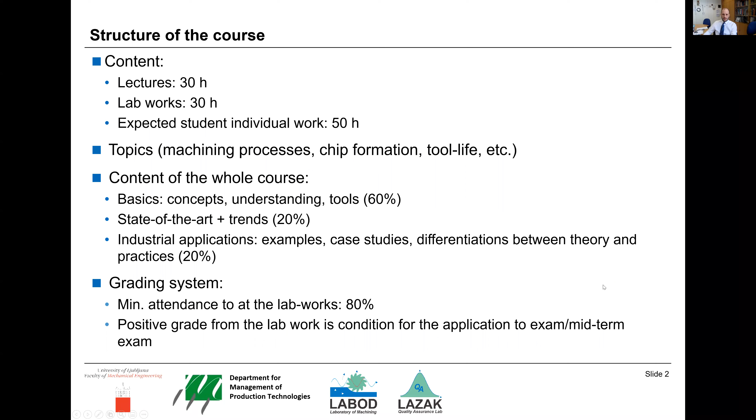The grading system is composed based on the lab works and the theoretical exam, and lab works are mandatory. 80% attendance has to be assured by the students. When this is performed, or accepted as positive, meaning they did all the lab works with the reports and so on, they are allowed to go to the exam.

We usually organize also a colloquium, so midterm exams. Half of the content is checked at that time from the students - let's say the half of the semester - and then at the end of the semester, if both of those colloquiums are positive, it's treated as the theoretical part being done.

If not, the students can go on the normal exam. Two chances to pass the exam are just after the finish of the semester, during the exam period. If that's not enough, or if they were not able to either attend or pass the exam, they will have one more chance before the start of the next year, in September.

The eligibility criteria I already talked about - it is mandatory that students first finish the lab works or practical work, and then with that they can go to the exam.

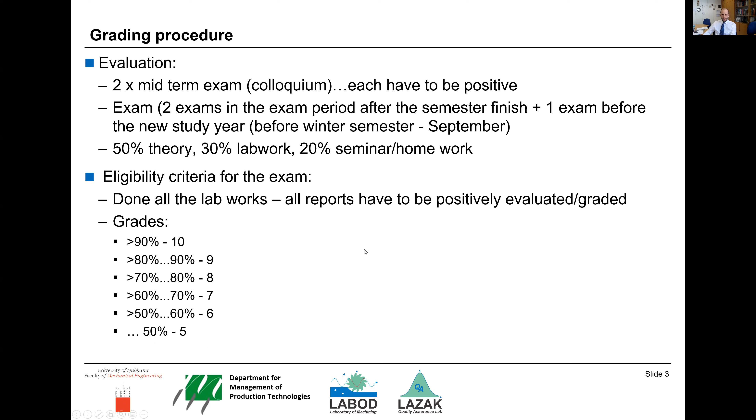Prerequisites for this course are related to the lectures in the first bachelor degree study: production technologies 1, physics, materials, machine elements, and tribology.

The objectives of the course are to give students in-depth knowledge on machining processes, from basics to advanced and innovative machining processes and technologies, so they get knowledge on the development of technologies, the calculations of costs, loads, tool life, optimization, and production cycles and so on.

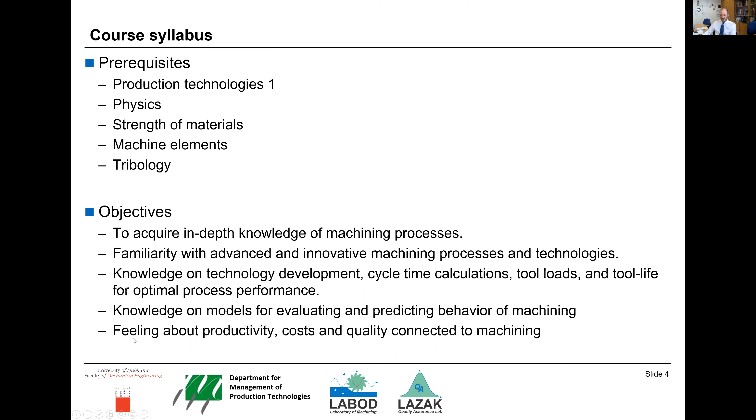Then to get the feeling about productivity, costs, quality connected to machining and the final product. The competences expected to be gained include understanding the field of machining processes, being able to evaluate, predict, and optimize the processes, and mastering the fundamental, theoretical, and applied knowledge on machining processes, machining technologies, as well as broader manufacturing technology.

Knowledge expected follows from the expected competences and skills, basically the same. As I said before, maybe the added part is that the ability would also be to critically reflect on machining process strengths, and even think about innovative R&D in this field.

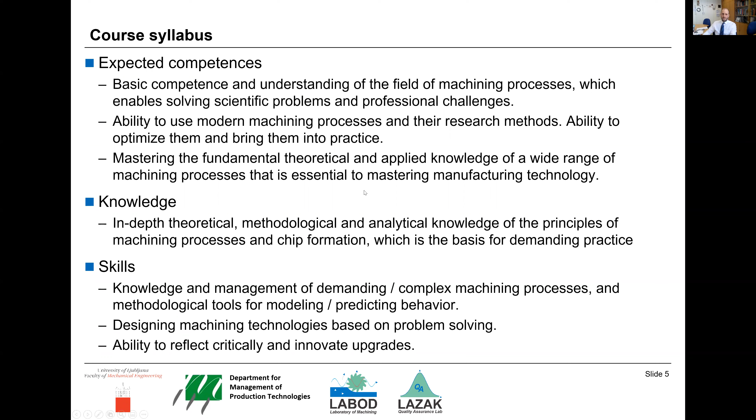How do we do the lectures or the whole course? Of course we have lectures in class. Then on the other side we have the lab works. In between, we also have practical work in the classrooms, where students, beside the theory they get from lectures, are introduced to practical work that will later be demonstrated, used, and tried in the lab work environment in really small groups.

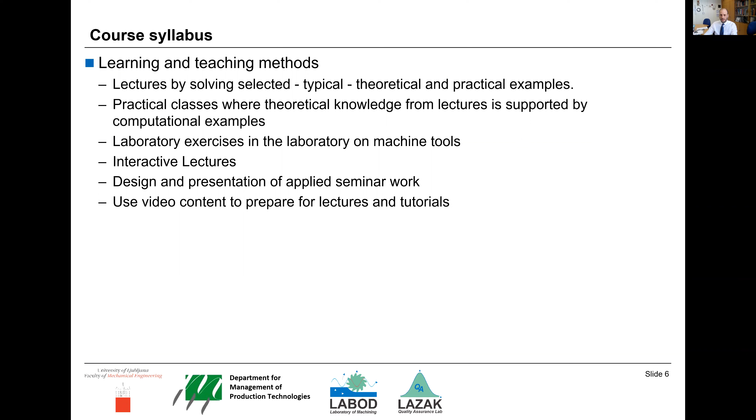As well, all the lectures are recorded, so the students will have the ability to go through these lectures later. If they were not able to attend, they will have the chance to attend it somehow, or repeat this if something is not clear. So that's why we upgraded the lecturing with modern teaching methods. All the lectures in this course are recorded.

That's related for now to the master degree level, where there's a huge possibility to select. Students have the possibility to choose their own lectures, or individualize their program. We have 6 study directions: 2 in energetics, 1 construction, then mechanics, production, mechatronics. Depending on which study direction the student chooses, they get 10 dedicated lectures for that direction. However, besides that, they can choose almost the same amount of lectures from different directions, so 8 individually selected courses. That means they have 18 dedicated lectures they will attend.

Since there is the possibility to select individually what they want, that means all students will have their own programs. And we face the problem of how to assure or give students this possibility to select lectures without overlapping lectures or even lab works in some cases.

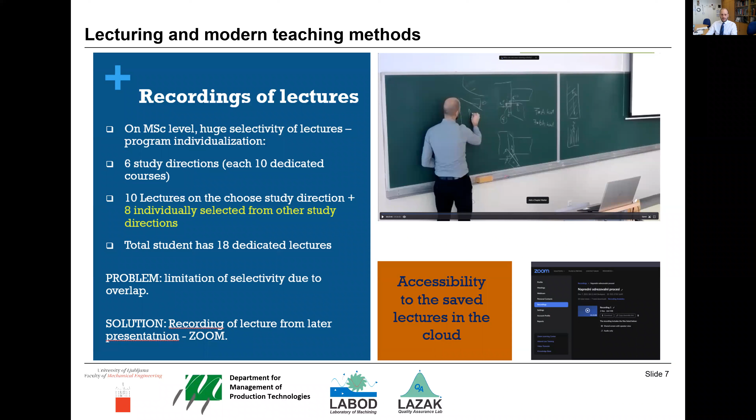So the solution is recording the lecture. If they cannot attend the lecture in person, they can later check it at home whenever they want, whenever they have time. So they will have accessibility to all these lectures.

The other digital solution we introduced is the answer to the problem before. If we have huge selectability or personalization of the program, then the question is how can we assure the timetable for the students? Each student will have their own timetable, and in the conventional way of having one table putting everything in, it doesn't work anymore.

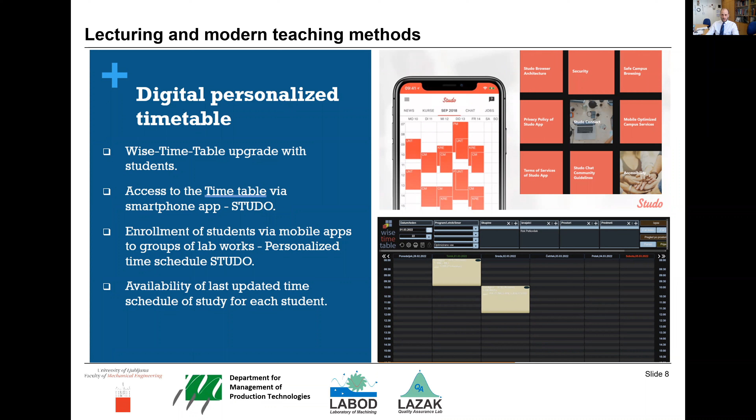So we now have introduced an app that provides students their own timetable, and they even have the possibility to prepare their own timetable according to the lab works. The same lab work has different groups, so there's repetition, and they can choose their own best fit group. Even for lab works, they assign themselves via smartphone app, and anytime they can see their own timetable or arrange it according to their schedule or availability.

The third digital app we introduced is the digital attendance list. It's an app that gives students the possibility to prove their attendance at different lab works, even lectures if they want. It's not obligatory now for the lectures, but for the lab works it is.

They will see which group they are in, where they have the lecture, and then when they go to the lecture they will prove their attendance. At any time, anyone from our student office, the student, the lecturer, or the lab work holder will know who was where. You can check how everything is tracked and easier. This information is easier to obtain.

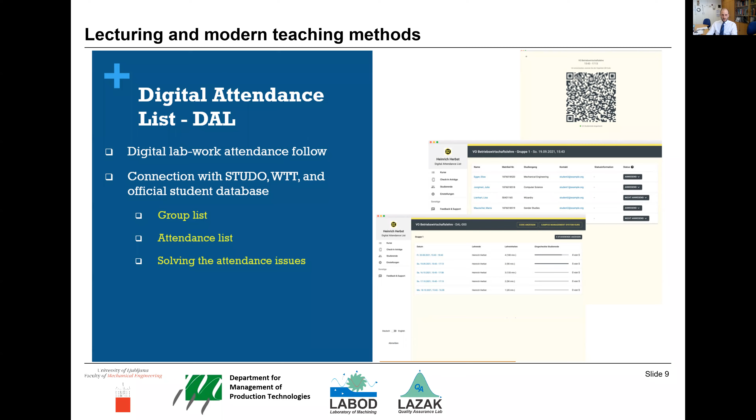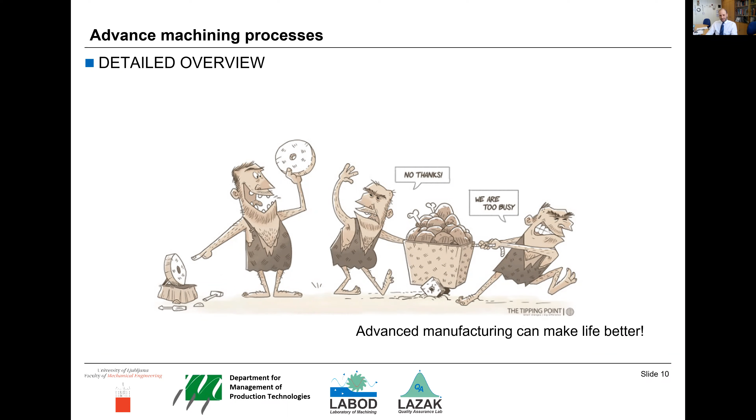That's the framework in which we work, and now going to the advanced machining process lecture. What we can say is that advanced manufacturing can definitely make life better. The content of the lecture: we have 15 lectures, each 2 hours long, so 2 hours per week for 15 weeks, the whole semester.

We start with the basic kinematics of machine tools and chip formation. We introduce the system of machine tool, cutting tool, workpiece, how they interact, the kinematics of machining processes for different processes, and the tool geometry and terminology behind it. Then we continue with the second lecture dedicated to defined geometry machining processes, like turning, milling, drilling, and so on.

We define first the cutting geometry, what's important, how the chip is formed as a consequence of the cutting tool geometry, and what are the basic machining parameters and how they interact with the chip formation. Then we go into the chip formation models, mechanics of orthogonal cut, mechanics of oblique cut, so it's from 2D to 3D. Then the application of the cutting models on real machining processes.

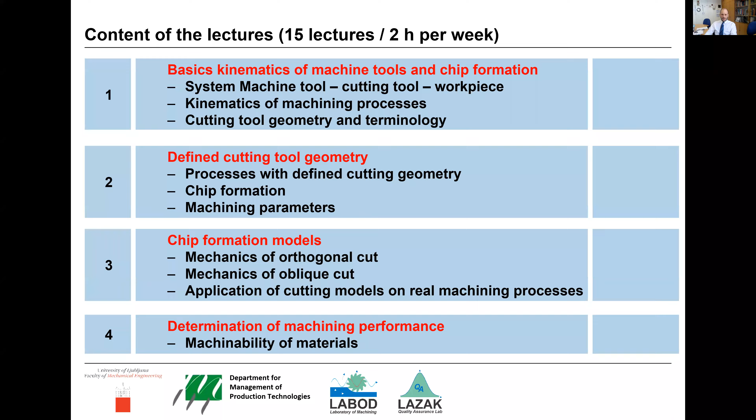So we show the practical experiments or practical applications of those mechanics of the chip formation. With the fourth lecture, we go to the machining performance, machinability, how different materials behave in machining, what availability they offer to form the chip, how the machining strategy and criteria can be met in effect, and vice versa.

And at the end, how we ensure productivity, what is productivity, what is the material removal rate, and that's a step in the direction into the optimization. Of course, the productivity is not just about time, but also the energy consumption that is related to the cutting process. So in the 5th lecture, we move to the cutting forces.

Which forces are then in machining? How do we measure them? How do we model them? How do we correlate the machining parameters, or how the machining parameters affect the cutting forces and stability of the process?

Then we move from the defined cutting edge to the undefined cutting edge geometry. So like grinding, polishing, and so on. And we define the geometry, what's behind, what's the problem with those processes, what are the benefits, kinematics, limitations of the process.

Then from this topic, we move ahead with the problem of the undefined cutting chip geometry, cutting edge geometry, where the heat load or the thermal loads are high in those processes. So with the next lecture, we move to the heat conditions in machining processes. So temperature fields in the machining zone, how the heat is distributed, how this affects the machining processes, and how this affects the surface integrity as a quality of workpiece material that is machined.

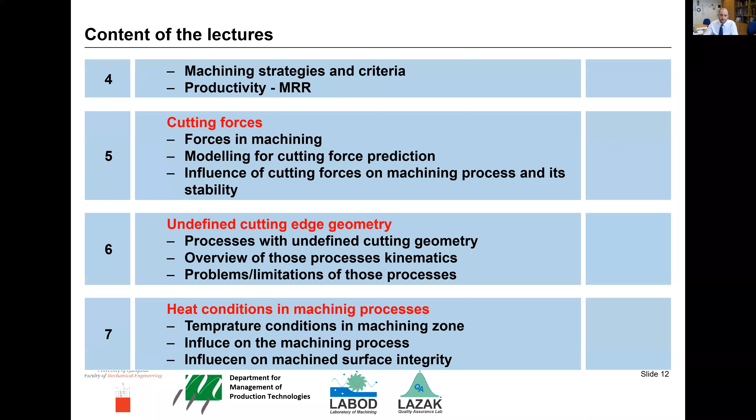We move on the other side. Heat is not problematic just for the machined workpiece or machined surface quality, but also this affects the tool wear. The tool wear leads to the tool life. So we go to the cutting tool wear.

What are the mechanisms of the wear, or removing the material from the cutting tool? How the tool life can be modeled. We mainly focus here on numerical or empirical models.

Then we go to the cutting tools. Which materials, that's the 9th lecture, which material do we use, why, what's the difference between them, how do they interact with different workpiece materials, where are the trends, usage of different materials, pros and cons.

We go one step further. Cutting tools are nowadays all coated. So why the coating is there, what is the coating, what are the functionalities of the coatings, characteristics, how do we put the coating on the cutting tool, PVD, CVD, how the coating affects the machining process as well, how this affects the cutting tool geometry.

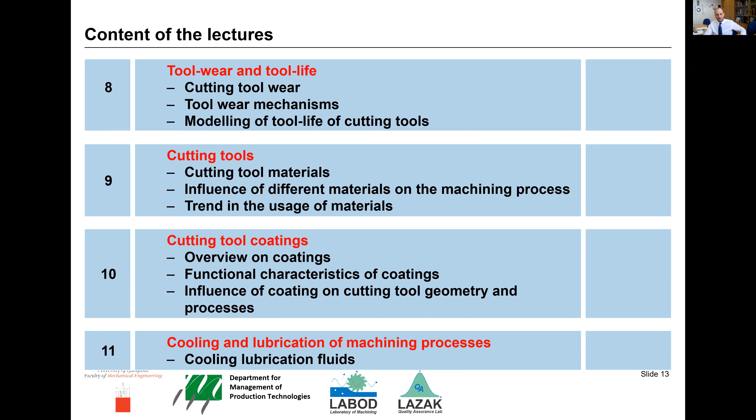When we know everything about the tool wear, about the cutting tools, forces, coatings, then we come to the 11th lecture that emphasizes the importance of the cooling lubrication scenarios in machining. So we are talking about the cooling lubrication fluids, cooling principles, lubrication principles, and trends and directions in the research and development in this field, sustainability, clean, safe, and so on.

Of course, a question then rises, do we really need them? And then the answer is in productivity and economy to some extent. This is then presented in lecture 12, where we cover the planning of technological parameters, constraints in defining those parameters, and how those parameters affect not just productivity, but also the economical aspect.

They are contradictory. So we have to know what is our goal, what is our fitness function, and then optimize the machining process. And that's the focus in lecture 13, where we are focused on high productive machining.

We distinguish high productivity from high speed machining. The objective of high speed can to some extent be the same, but it's more related to the chip formation, and the students are sometimes confused. So we dedicated one lecture to distinguish high productivity and high speed, and then how we can optimize the machining parameters according to the goals or measures.

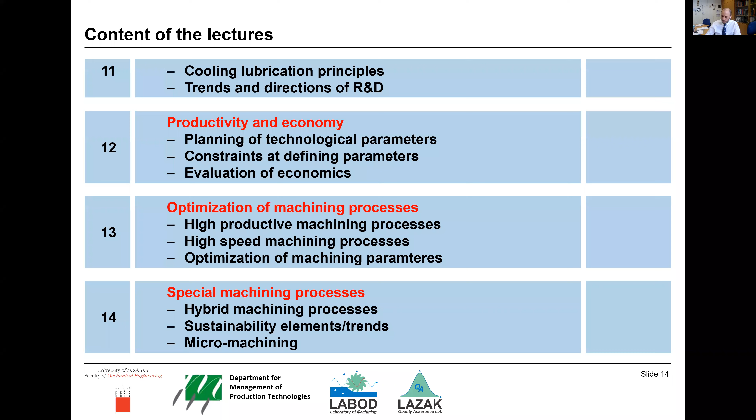The 15th lecture is a guest lecture. We invite one expert from the industry, usually an industrial partner that we already collaborate with in research. This can be from the automotive industry or tool making industry, where they have a lot of experience, and then they can, from the practical aspect, show the students the importance or usage of the knowledge that they got from the first 14 lectures.

Besides that, we also usually do excursions to the industry.

That's normally performed in one of the last 3 Fridays in the semester. This year we were in the LTH company. It's an aluminum casting company that, beside the casting, also does a lot of machining as a final manufacturing operation before getting the final product. Of course, mainly working on the automotive sector.

Yeah, the literature: we have some books, mostly in Slovene, a bit older ones. Then in 2014, a colleague presented the first book on metal cutting theory and application. Then they also have the possibility to go a bit higher with the level if they want. So there are 2 books, one on sustainability in modern metal cutting processes, and from Professor Altintas, Manufacturing Automation, that goes also into dynamics and geometry and so on. And now a new book is also in preparation.

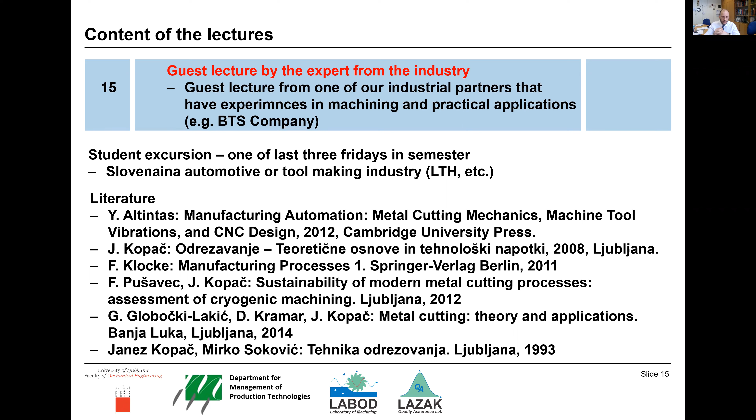So that was a quick overview. I plan to go a bit into detail on each lecture, what we show there to the students, and maybe we can later even discuss. So I will have 2 to 3 slides for each lecture now, showing how we present different topics.

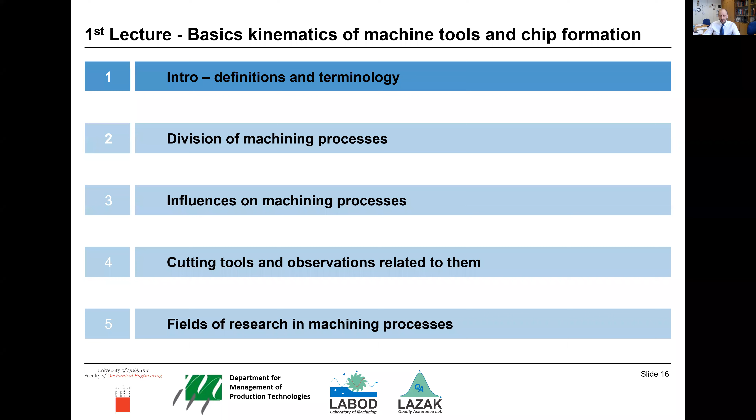So the first lecture is basic kinematics of machine tools and chip formation. We go here into the definition of the machining process, chip formation, the terminology behind, then how the machining processes as well as the manufacturing processes are divided. So single cutting edge, multiple cutting edge, defined geometry, undefined geometry, continuous process, interrupted process, and so on. Then we go on the machining parameters, the influences on the machining processes, the cutting tools, geometry, and then the trends of research in machining processes today.

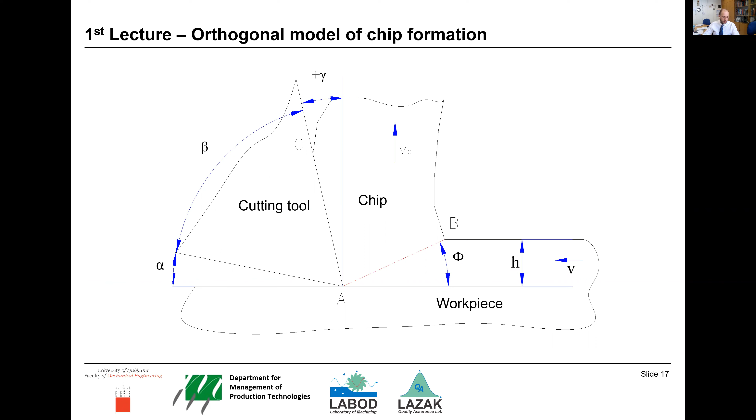So as main terminology, they get familiar with the orthogonal model, the chip, how this one is formed on the rake face, what is happening on the flank face, the thickness of the chip on the plane and the actual chip thickness, the rake angle, flank angle, cutting tool angle, and so on. That was the first lecture.

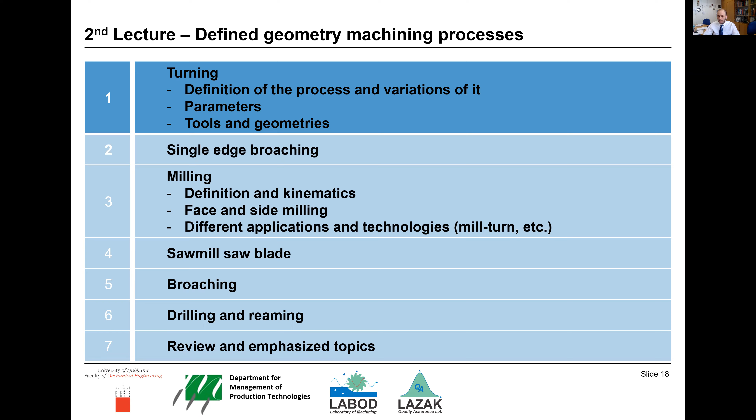And then with the second lecture, we go on the defined geometry machining processes. So the turning processes, then single edge broaching, milling. With those we touch the parameters, the tools, the geometries, the productivity, the number of cutting edges, the parameters in the sense of cutting speeds, feed rates, approximately where we are, to get the feeling, rule of thumb. Then sawing, broaching, drilling, reaming, and then we summarize at the end.

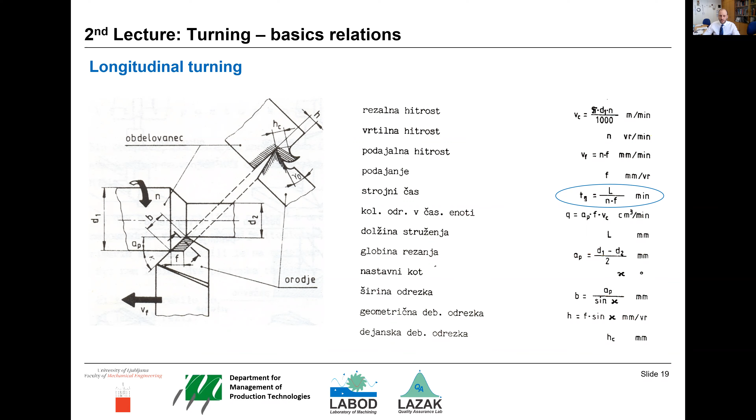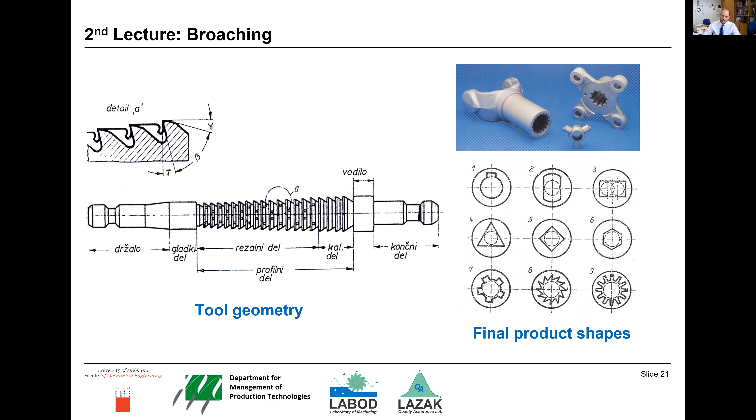So, for example, in turning, we go through the kinematics, the chip cross section, all the equations behind how the cycle time is calculated, the productivity, how the cross section affects the loads, how we manipulate this with the machining parameters. Then how the cutting inserts look, how they are mounted in tool holders, how the loads are transformed. Then geometry, for example, of broaching, what kind of final products are obtained with that kind of process, how this one differs from turning and milling.

Then in the third lecture, we go to the chip formation models. Here we first overview the mechanics of orthogonal cutting, what orthogonal cutting is, how we describe this process, how we can model it, what the shear angle and shear plane are, what is happening in the shear zone, what kind of stresses we have there, and then the velocity regimes in all three cutting zones. So the zone of chip formation, the zone of sliding of the back surface of the generated chip on the rake face, and the third one, the zone where the machined surface rubs the flank face of the cutting tool.

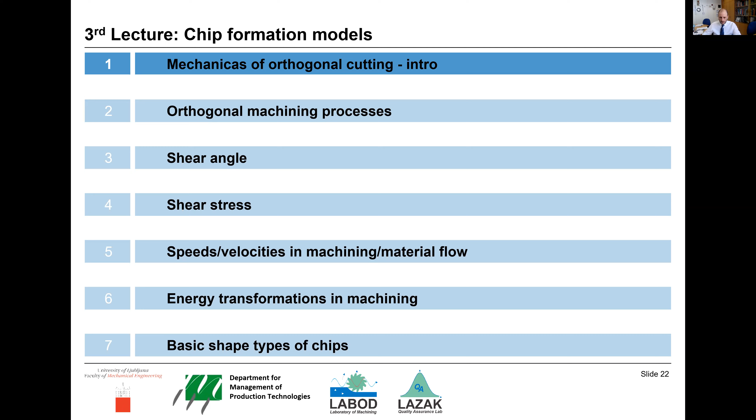Then we talk about the forces, the energy transformation, the machining power behind, so that we can then use this for energy efficiency and optimization. Then how the chips look, what size the chips should usually be, or what are the unfavorable chips. So we talk about the orthogonal process, then which processes in reality are close to the orthogonal model, then all these models of chip formation.

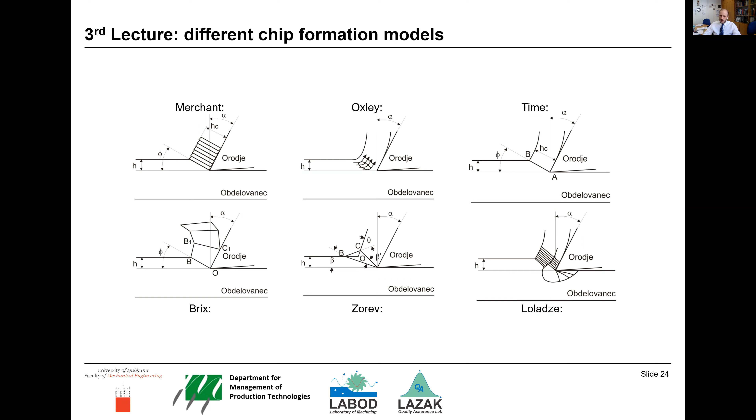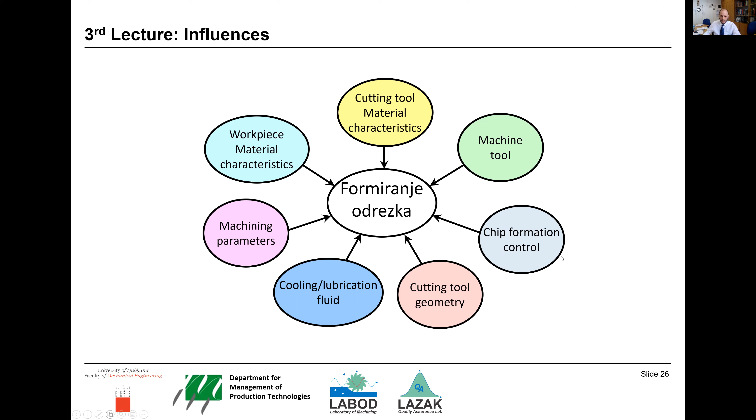Then we end up with the most simple one, Merchant's, and with Merchant we go to the velocity diagrams, and then we analyze the Merchant law. We will see this later. And we go through all the influences on chip formation. Oh, sorry, I forgot to translate this middle one with the chip formation.

Then in the fourth lecture, we go on the machining performances, so productivity and material removal rate concept in machining and manufacturing, the cycle times and so on, and then how do we machine, how do we test the machining performances, and how these machining performances are related to the material, to the machining parameters.

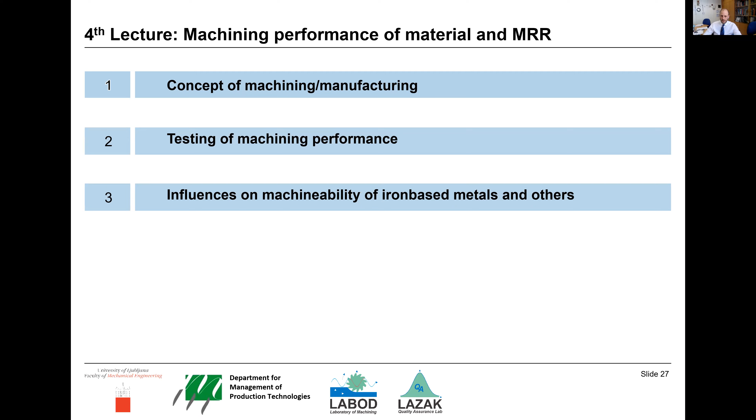And then we go through different materials, iron-based materials, then copper alloys, aluminum alloys, high-temperature alloys, like nickel alloys, titanium alloys, and magnesium, for example. We go through those materials, what is specific for the material, how do we start with the machining process and parameters in particular material groups.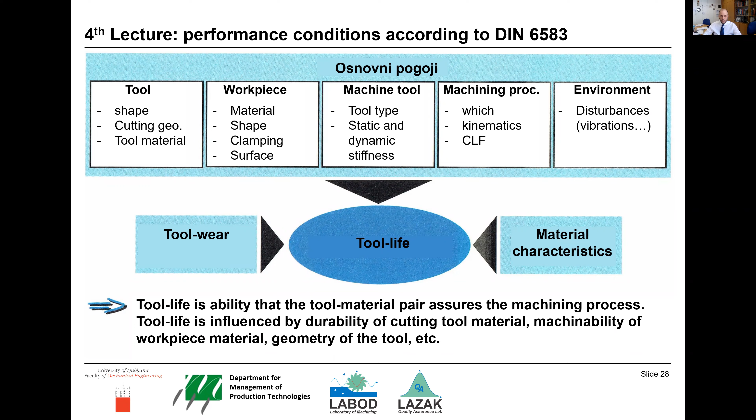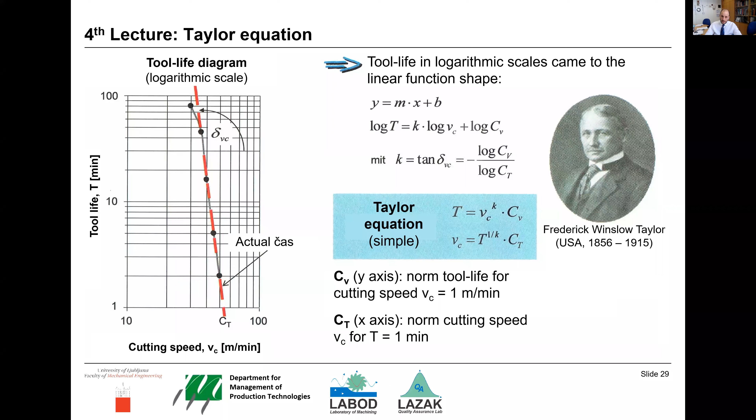Then, of course, we correlate here the tool, workpiece, machine tool, then the technology or kinematics or strategy, and how the material characteristics are connected with the tool wear and the efficiency. So to get appropriate tool life. We also touch the Taylor equation, where empirically we can define the tool life, and get a feeling about how the cutting speed is increasing the productivity, but on the other side, this one is negatively affecting the tool wear and the tool life.

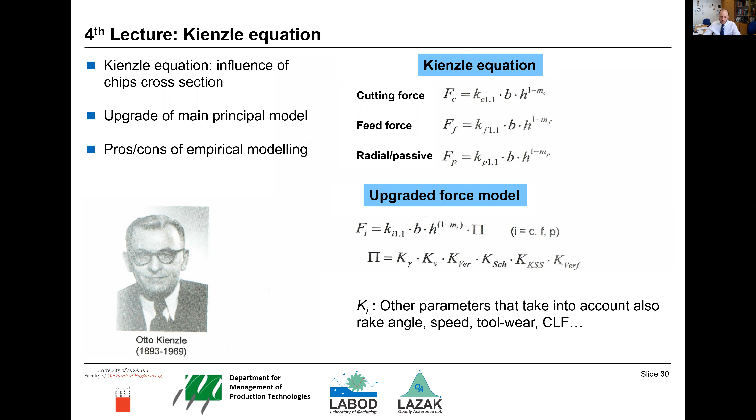Then, of course, in the machinability, there are also questions about forces. So we go to the Kienzle equation, how the cross section is affecting, in combination with material, the cutting forces, or actually all three components, cutting, feed, and radial force, how this simple Kienzle equation based on the chip cross-section can be upgraded with the rake angle, tool wear, coating, or cooling lubrication fluid. Then with this one, we move to the fifth lecture, the cutting forces.

We talk about the 3D loads on the cutting tool, how the cutting force components affect the process. Then we go in detail back when we measure the forces, how we transform those forces in macro scale on the machine process when we measure them. How can we, based on those measurements, go into the chip formation and evaluate the shear stresses in the shear zone, or the friction coefficient, normal and tangential force on the rake face, then normal and tangential force on the flank face. That's all we can get with, of course, some assumptions.

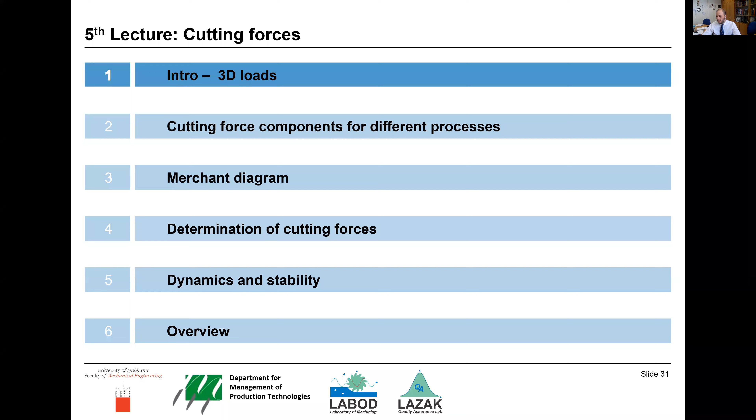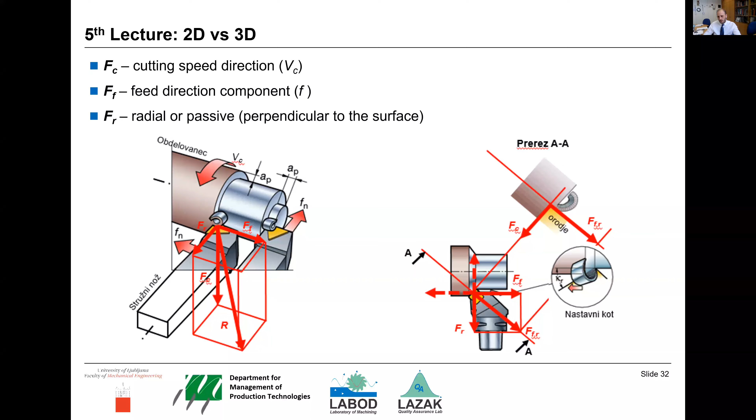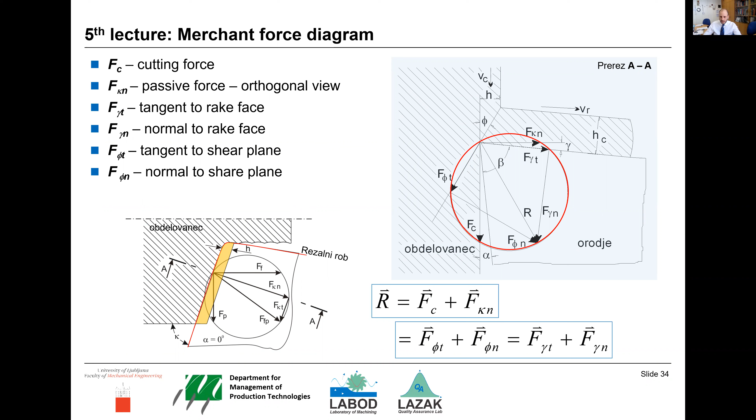Merchant diagram. Then how the forces not just affect the loads, but also the dynamics. They lead to the dynamics of the process, and in the end to the stability of the process via chatter and so on. So these are some slides from the turning. So we go all down from the 3D to 2D perspective, the turning, then milling, how the chip is formed, and of course also the forces, what is the dynamics in forces, the Merchant diagram with this possibility to evaluate different regions of the cutting zone, and then the stability. At the end, it's so-called chatter appearance.

How can we meet this? How can we model this? And really get a stable process, or a process where any disturbances in the sense of chip size or the forces can be damped or decreased.

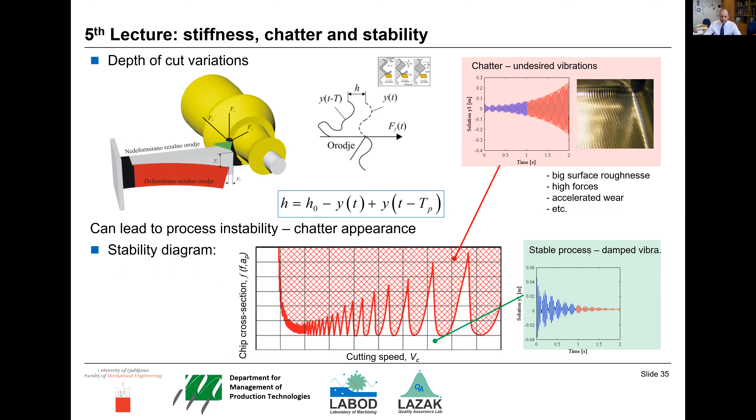In the sixth lecture, we now move from the defined geometry to non-defined. We talk about abrasive processes, fundamentals of grinding. We start with the grinding because that's the easiest to explain. The chip, the changing of the chip, the cutting edge, changing of the cutting edge, negative geometry, thermal and mechanical loads. Then how it is needed to condition the wheel, so by dressing and truing, and then of course also about the productivity.

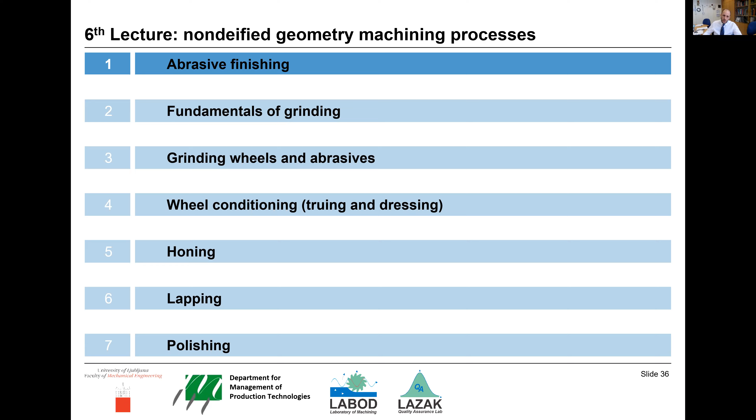We compare this with the defined cutting edge geometry processes, and then we go to honing, lapping, and polishing. So we show all the processes, we compare them, then we emphasize the importance of the quality of the final products, because all these processes are low productive, but the focus there is on the quality of the final product. That's not just related to the surface roughness, but to the whole surface integrity. It's the hardness. It's the residual stresses. It's the thermal affected zone that is normally negatively influencing the fatigue life or the functionalities of the final product.

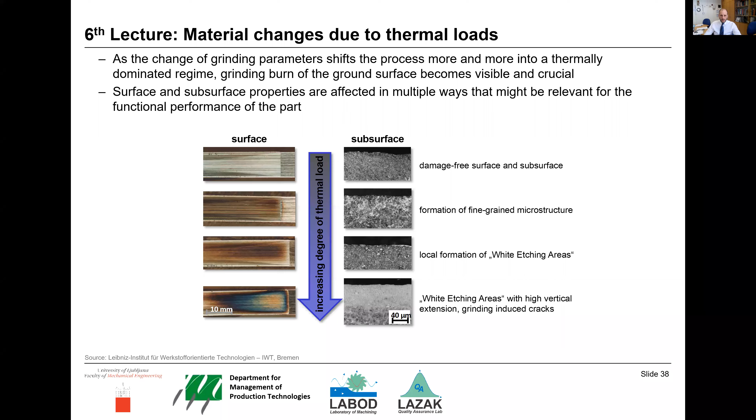So we see now that thermal loads are really important. That's why in the seventh lecture we go to sources and consequences of the thermal loads and the high temperatures. How do we measure them? If we are able to measure them, then we get the data. We can improve the process in the sense to lower those thermal loads to the optimum level, not to the maximum level that we can get, because this can be negatively influencing the process. We all know if we freeze the workpiece, the cutting forces will be much higher, and of course then the loads and the tool wear will be again higher.

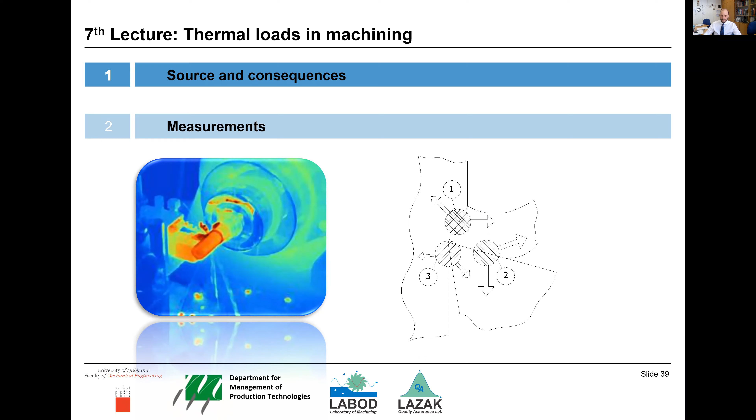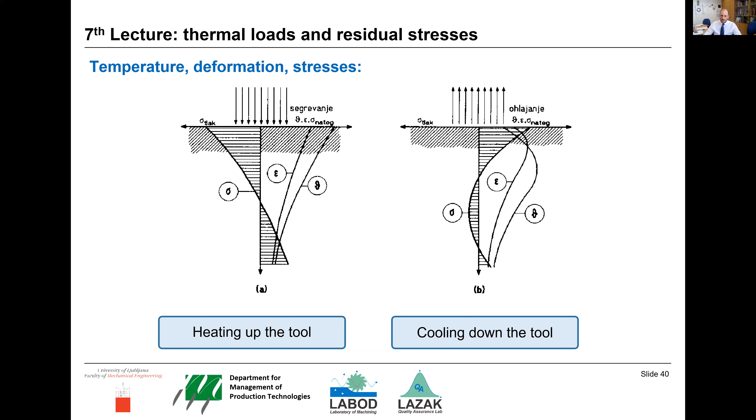So there is the optimum temperature, and following the thermal sources and sinks, we can then talk about the optimum temperature regimes. We talk about the residual stresses because of the thermoplastic loads or mechanical loads. We talk about the conventional way of measuring temperatures, and also about the novel trends and innovations in this field.

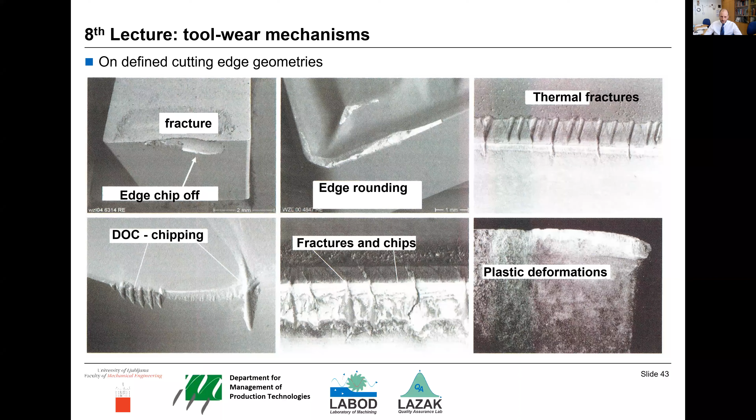And then go to the 8th lecture with the tool wear and tool life. We talk about the different tool wear mechanisms, from fractures, thermal, chemical, to the depth of cut notch wear, rounding of the cutting edges, thermal shocks. Then we give the comparison, or each of those wear mechanisms is then analyzed.

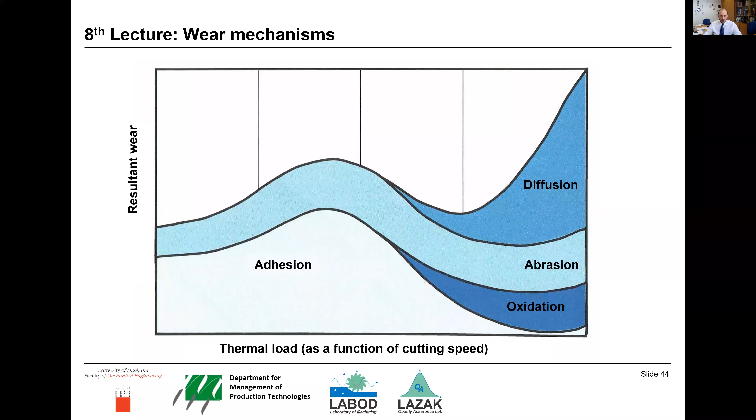So where the adhesion is happening, how do we prevent this, where the diffusion, abrasion, oxidation is happening, and we usually correlate this one with the thermal loads and the cutting speeds, which are in machining relatively connected. So higher cutting speeds are usually reflecting the higher thermal loads. So that's why we can connect this. How do we measure or characterize the tool wear? How do we measure this? And this will be then later used in the lab works.

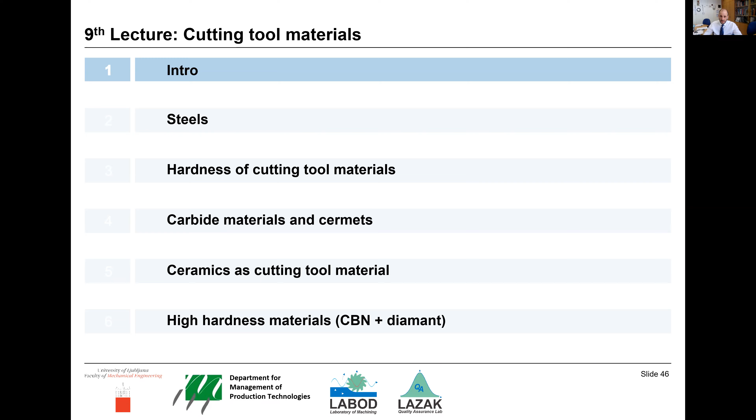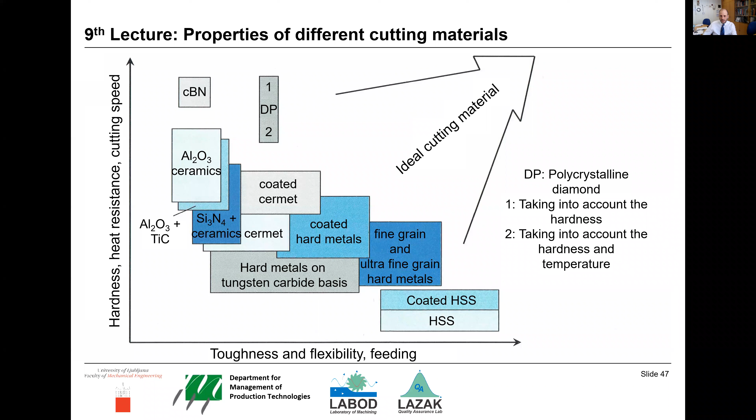In the 9th lecture, we go to the cutting tool materials. So we present steels, we present the different materials that are used. Then we go through each of those, so through the carbide materials, ceramics, CBN, diamond. We show them the comparison between the toughness, flexibility, or on the other side, the hardness of the materials that are used for the tools, and where the ideal cutting material would be, of course.

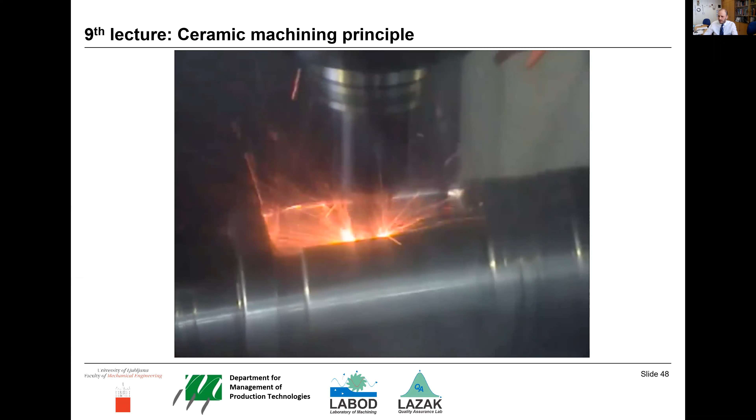Then we show some completely opposite idea of the chip formation. So why ceramic is used, what's behind there. The idea is completely different, not to decrease the temperature, but raise the temperature. Why is this so? Then, of course, the tools can be even further improved with the coatings. So we go through the needs of the coatings, functionalities of the coatings, how they are made. So CVD, PVD, multi-layer systems, and how do we characterize or evaluate the coatings.

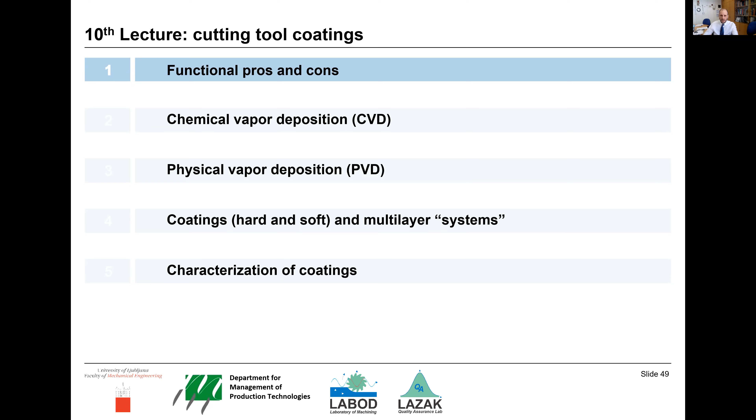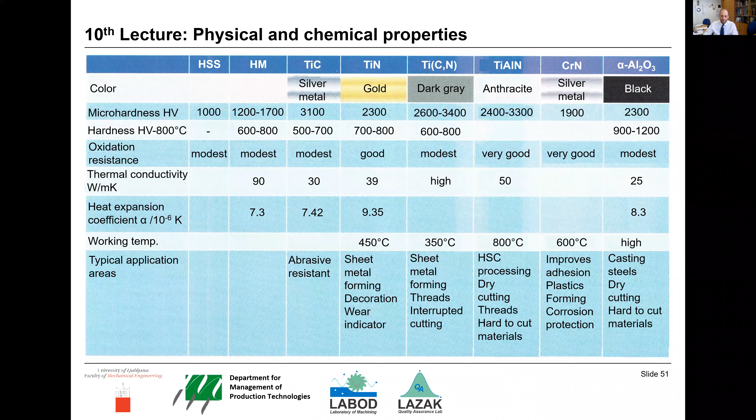So we go through these basics, and then what's the comparison between coatings. So the reference is titanium nitride. We all know titanium nitride for machining. It's not really state of the art anymore. And then we see where the problem was with titanium nitride and how these new coatings are distinguishing or improving the performances. In the 11th lecture, we go to the cooling lubrication fluids, like we said before.

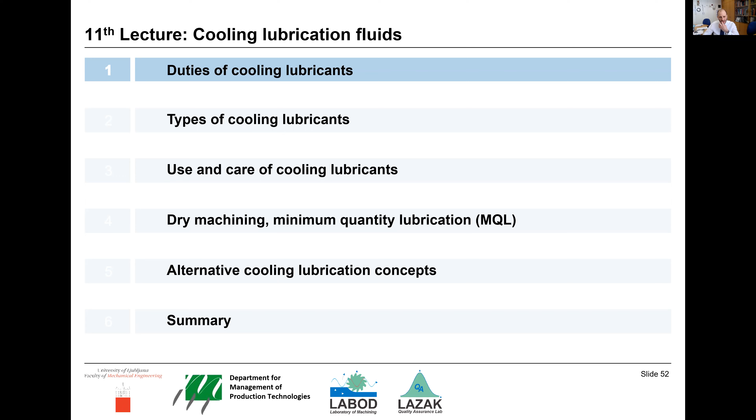What is the purpose of those, or the usage of those? Then the different types of cooling. How do we use them? How do we maintain them? How do we try to meet them with dry machining, minimum quantity lubrication, and what are the alternative cooling lubrication concepts that are today really hot stuff, really researched not just in the research area, but also in the industry.

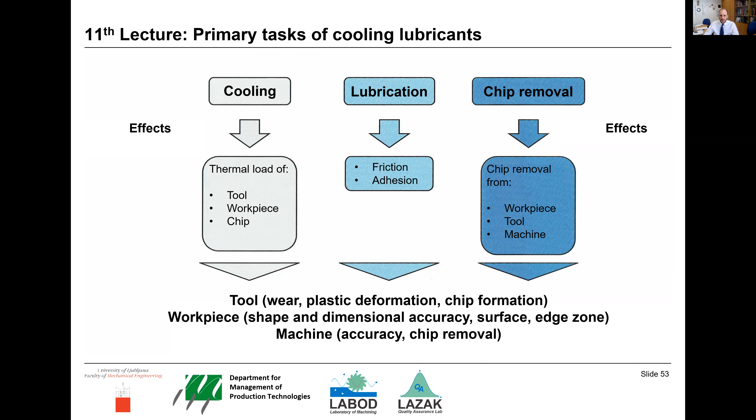So we go through cooling principles or mechanisms, then lubrication, and of course also the chip removal. That's one of the really important functionalities of the cooling lubrication fluids. We present the alternatives, so dry, minimum quantity lubrication. We even go to cryogenic processing. And of course, we show them that 14% of all the manufacturing costs is related to the cooling lubrication fluids.

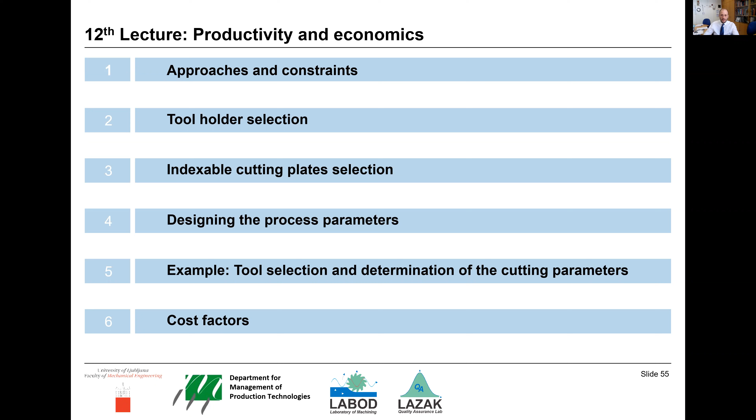And then we come not just to the productivity, but also to the economics. How can we evaluate the productivity? How do we evaluate the economics? How do we define the tool holder index? How do we define the whole technological plan? Just with the technological plan can you do the evaluation of costs. That's why the technological plan is needed for the economical plan. That's in the 12th lecture.

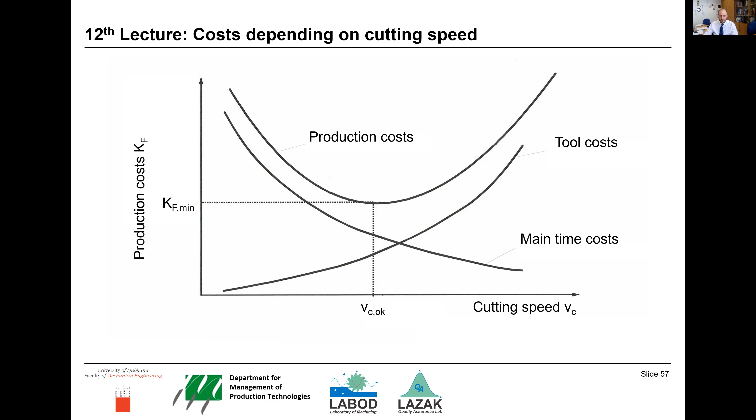We talk about the different costs, fixed costs, variable costs, and the production costs. Of course, it depends on the focus of the optimization. We vary this, we look from the other perspective of this graph or diagram. Then we go to the optimization. We talk about the high performance cutting, on the other side dry and maybe a bit cost effective machining from the other perspective.

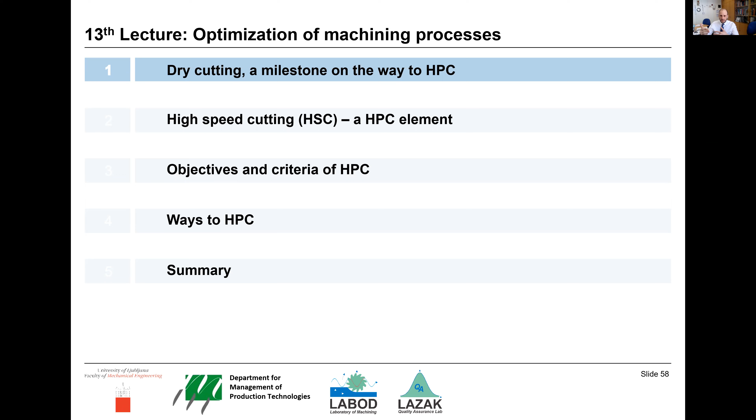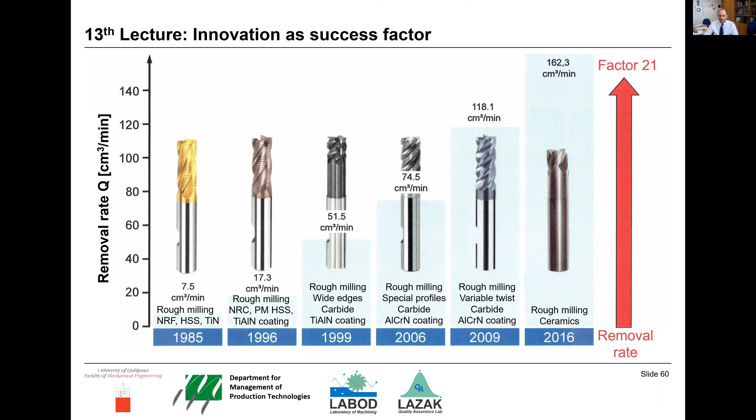Then beside HPC, so high performance cutting, we also have the high speed cutting. What are the ideas there? How to distinguish high performance cutting and high speed cutting? Through the graphs of tool life, surface integrity, cutting forces, thermal loads, and then the productivity or the cutting volume. We go a bit through this productivity, the material removal rate, how this was improved with the different developments in the cutting tool and the technology.

How do we improve, or when will we get to high performance cutting, different ways of achieving this? And in the 14th lecture, we go to the special machining processes, where behind is the productivity, sustainability, quality, hybrid machining processes, and micro machining.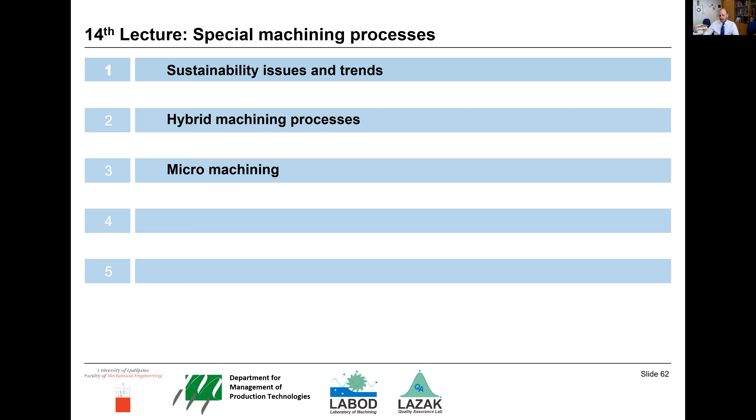So we compare, for example, conventional oil-based emulsions with today's high pressure cooling lubrication systems in the industry, and analyze the whole life cycle of the machining process. For example, how dry machining can bring benefits via lower loads or costs for cleaning, easier recycling. But on the other side, do we improve the machining process or not? That's the question, and when we get to the bottom line, the biggest benefits.

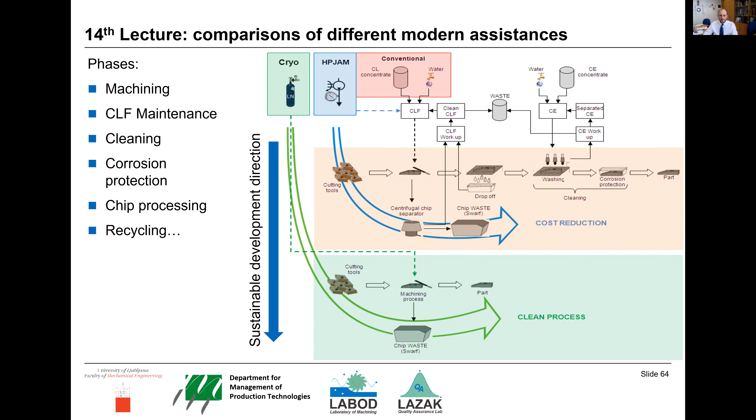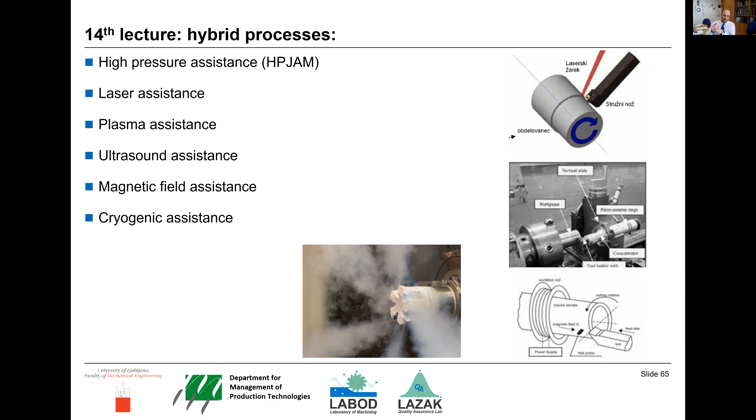Hybrid processes: we go through high pressure jet assisted machining, then laser assistance, plasma assistance, ultrasound, magnetic field, and cryogenic assistance.

And at the end, micro machining. We have one of those micro machining machines in the lab, so students understand how the chip formation is changed, what kind of kinematics and accelerations are involved, and the problems of preparing CAD/CAM technologies for that kind of machining operation. It's a bit of a different world, even from the tolerance perspective.

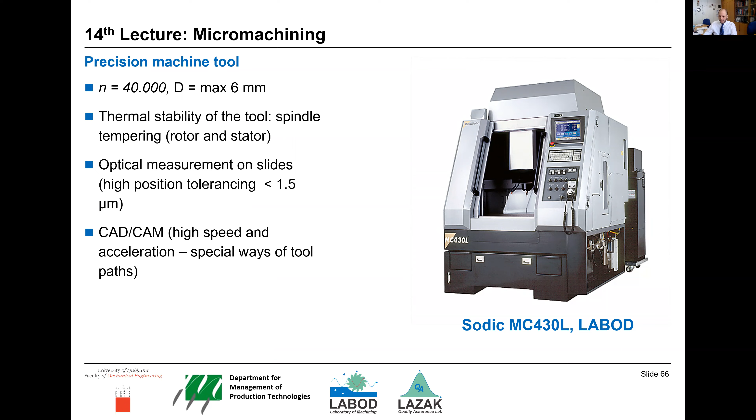After the lectures, we have the practical works. These are 6 classroom works where we go through the machining processes and parameters. They do calculations about the chip cross-section related to basic parameters like speed and depth of cut, and how they get data from the technological databases and how they are used.

In the second one, we go to the calculation of cutting forces. They calculate the forces based on the Kienzle model, using data from experiments where they define the specific cutting force and the constants related to the material. They also have to understand why we go to the logarithmic scale, how we get from this exponential function to the Kienzle function, and so on, calculating that on their own.

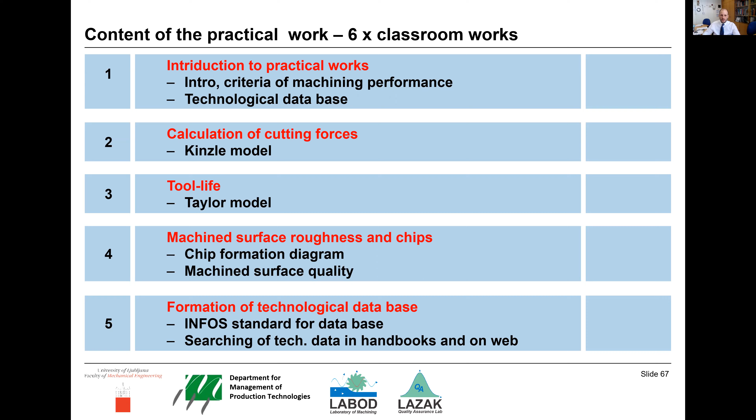The sixth lab or class work is related to the geometrical tolerances on the final products. When you know what you have to get from the machining process, it's a question of machining parameters as well as the machine tool, and each machine tool has to be geometrically characterized. This is done on different principles—it can be with so-called ball bar tests, or with laser evaluation of the precision of the machine tool. So they are introduced to these methods.

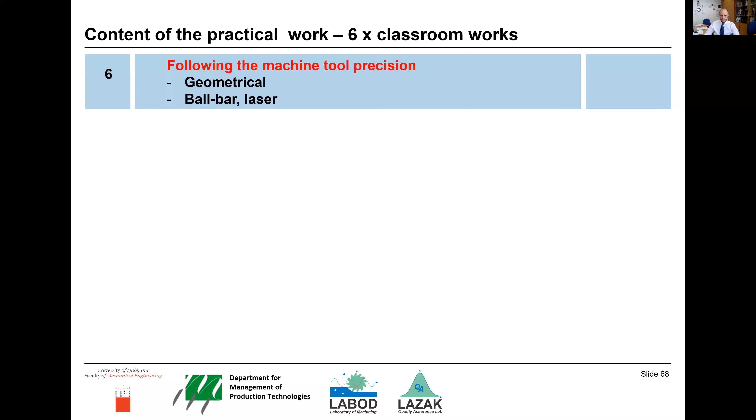All this is the base for the lab works later. These are done in small groups, usually 5 to 10 students, in the lab behind the machine, doing different tasks on their own or with help from the technical staff, assistants, or technicians. So they go into the lab, and usually these lab works last 1.5 to 2 hours.

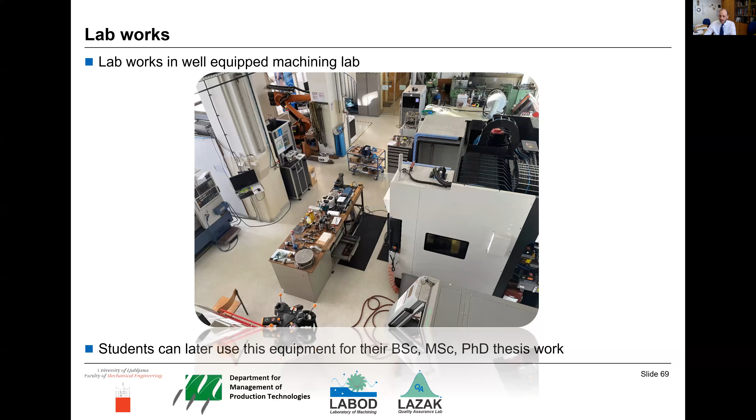For now, they are not really allowed to use the equipment on their own—for some of them, yes, but normally a technician is behind them. Later, for the bachelor thesis, final work, master's, or PhD, they work alone on those machines. In this course, we give them 9 lab works.

The first one is machining forces. They come normally to a lathe or milling center equipped with a dynamometer and measuring equipment, then measure and analyze the forces. For example, in turning, they try different operations, testing different feed rates, depths of cut, and cutting speeds, and see what the influence is on the cutting forces.

The second lab work is on machined surface quality, usually on the turning process. From the classroom lab work, they calculated theoretical surface roughness. Now they use the same parameters and measure the actual surface roughness. We correlate this to the theoretical value and to the machining parameters they inputted to the machine tool.

The third one is related to chips. Again they go on the lathe, varying the feed rate, depth of cut, and cutting speed. They collect the chips and prepare a really nice table, written on the floor, a huge one, about 2 by 2 meters. It's nice to see. They place the chips according to feed and depth of cut, and observe how feed, depth of cut, and speed affect chip breakability.

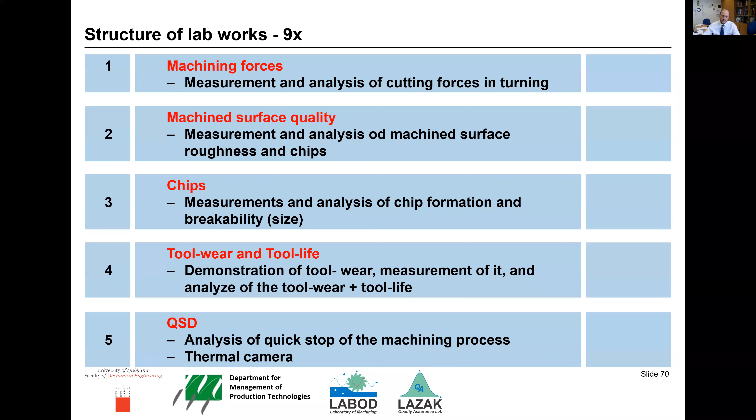Then we have the fifth lab work: the quick stop device, or chip formation analyzer. We have three such devices for three processes: drilling, milling, and turning. Usually turning is used because it's the easiest to demonstrate. We do the machining and then suddenly stop the process, so they can analyze the chip still attached to the workpiece and see how it is formed and connected to the workpiece. We are also now introducing the thermal camera—this year was the first year we got it, just to show students what you can get even from thermal filming of the process.

On the 6th lab work, we go to the milling center, which has a special option that follows the loads on all the servo drives. It's a 5-axis machine, meaning 5 servo motors for each axis—3 linear and 2 rotational—plus the spindle, so 6 signals total from which they can see how following the loads on the machine can improve the process. We usually do a drilling process with a worn tool and see how the machine senses this and can even stop the process if catastrophic wear occurs.

The 7th is geometrical accuracy, also an option on the machine tool. We have a coordinate measuring device connected to the machine tool, which gives feedback to the machine for compensation. So you machine one workpiece, and if some geometrical entities fall out of tolerance, this is sensed by the CMM connected to the tool. It gives feedback to the machine tool, and the next workpiece is improved geometrically. The students see how this works.

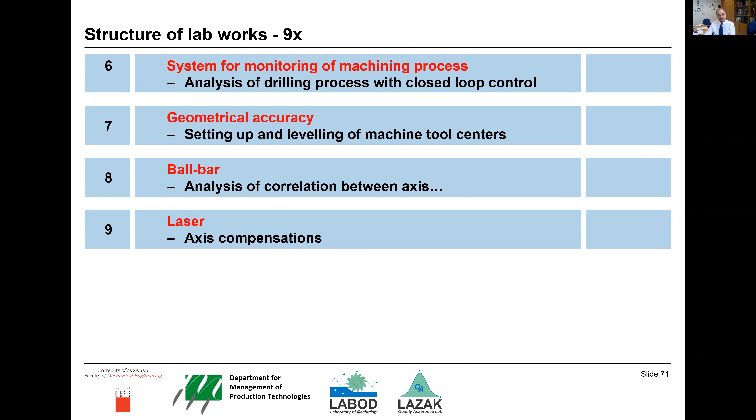The last one is the use of a laser on the milling center. Since the milling center must have precision in positioning tolerance, this can be measured with the laser. Once you know the errors, you can compensate the controller to reduce or eliminate them. So they artificially delete all compensations in the controller, then perform the laser measurements, and use those measurements to redo the compensation in the controller—so they learn how to improve accuracy from the software perspective.